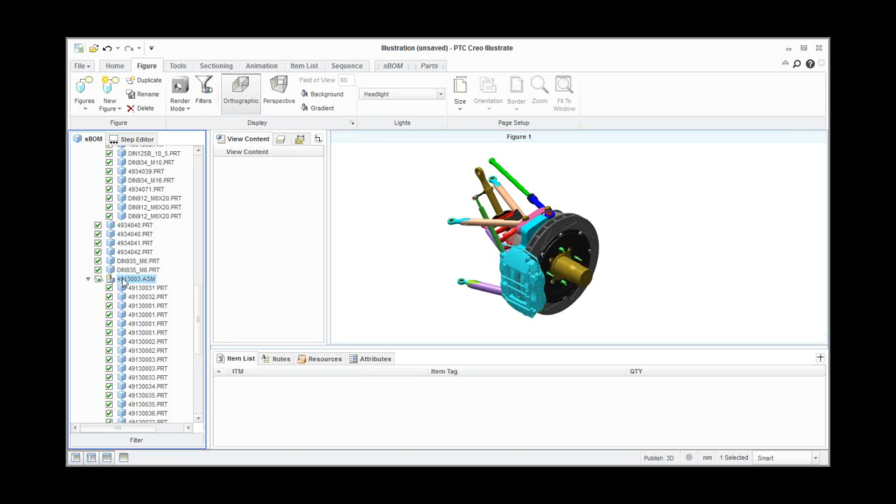So I want to get the whole of this assembly. I'm just going to click this in the tree view, the top level of the assembly, and now I've got just the caliper part. If I right click, I can then say open this as a new figure, and it's just going to bring this particular part in as its own figure.

So I've quickly disseminated that part away from the main assembly, and again I can use this as a new figure. Select that current view, and that will be my view. So again, I go to figures, and now we've got the two, so I can quickly move between them.

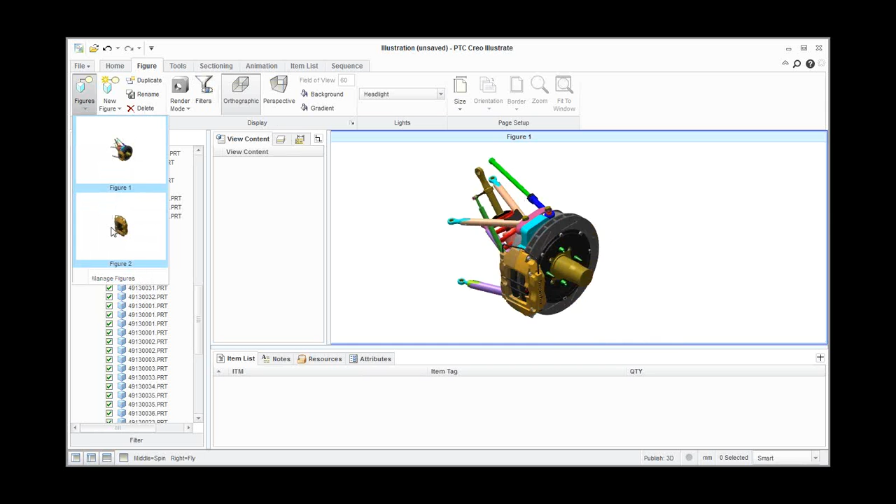The other thing I can do here is right click and rename this. So rather than just keep calling them figure 1, which would go on forever, I can say I want to give this the name exploded view. So I'm just renaming it.

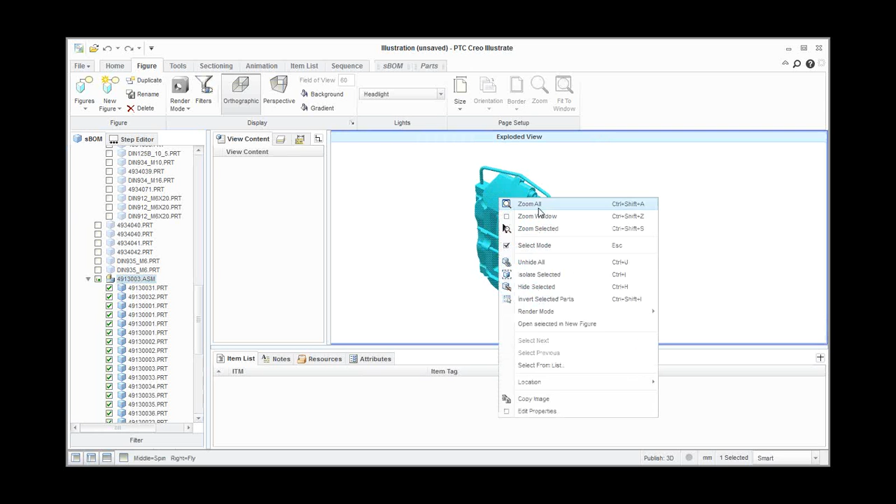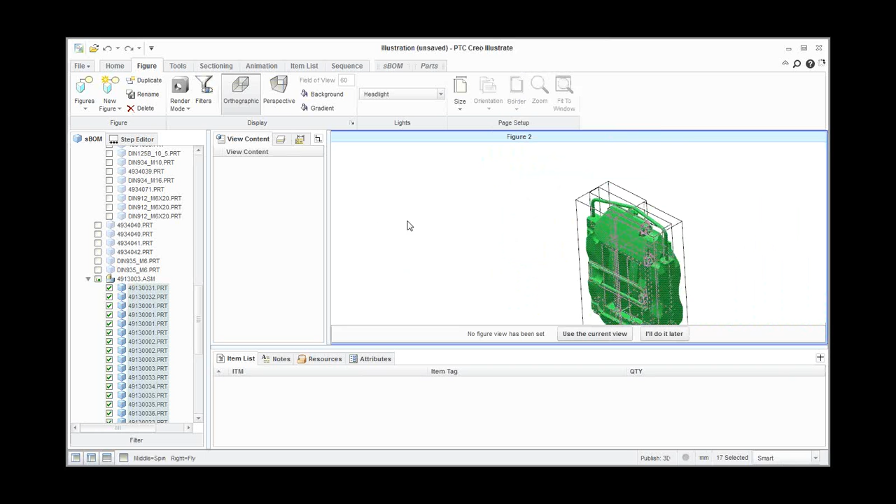I can do the same again. I'm going to take a few views of this and use this as a current view, and rename it as animation, so we'll do some animation. And I'm going to do the final one, which we'll call a sequence. As you can see, it's easy to just right click and rename, and then I've got those views that I want.

So I'm going back to the original figure, the exploded view. If I want to create a technical illustration of this to go into that XML publication, there are a couple of things I need to do. I could just use it as it is, but for this example I want to use it as an exploded view. So what I can do is transform this.

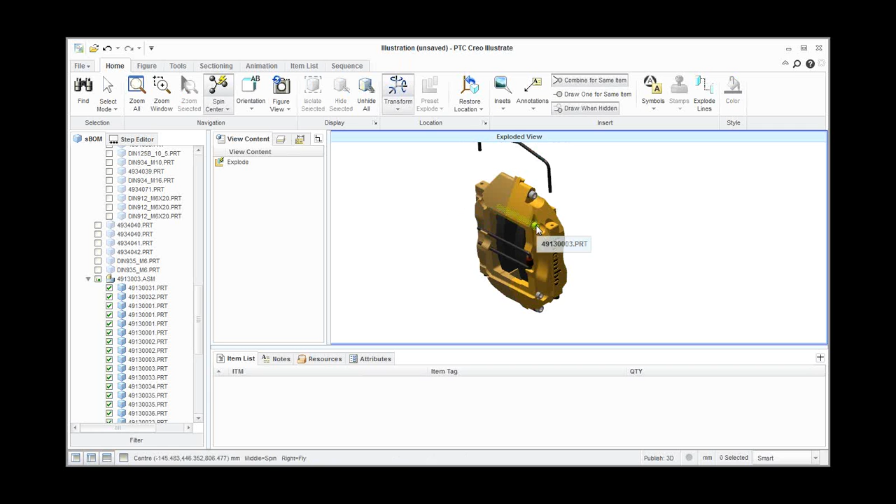I can pick up these individual parts and move them away, and you can see it gives you a measurement as you move them. I can pick up these screws, and hopefully pick up more than one at a time, so I could just bring these out. I can zoom in and out if I need to as well.

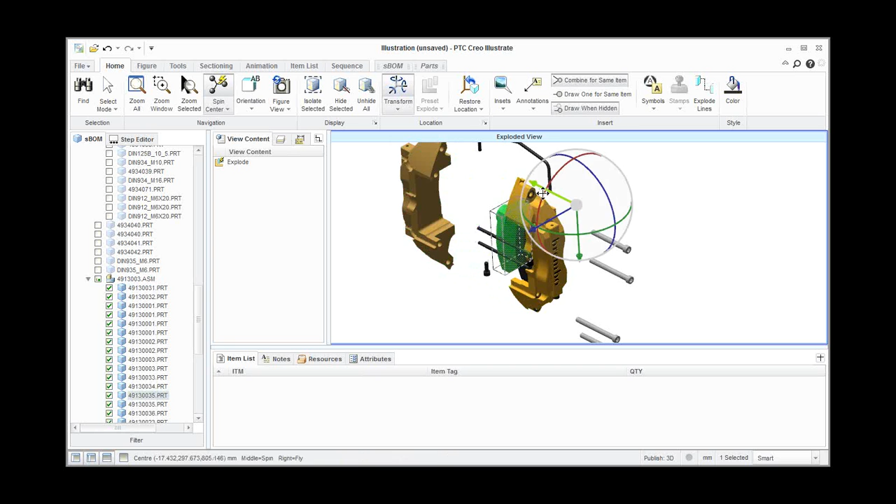And then let's move these away. I can move the casing away, the calipers as well. Let's just move this part a bit further this way. So you can see I begin to work with the model. So I'll just move that out.

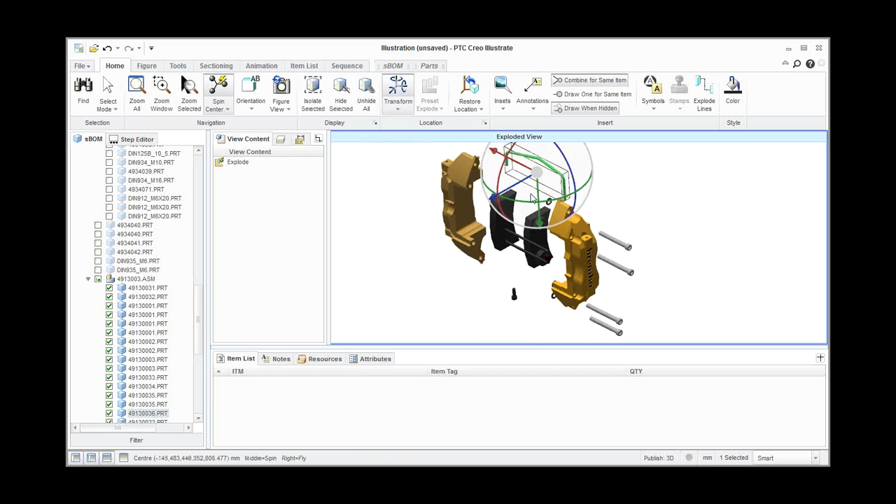So what I want is to get into a position where I can create an exploded view with actual annotations, so I can annotate each part. I just need to separate them a bit more. I could do a lot more work on this, but for this purpose, you'll see that we're going to create quite a lot in the time we've got today.

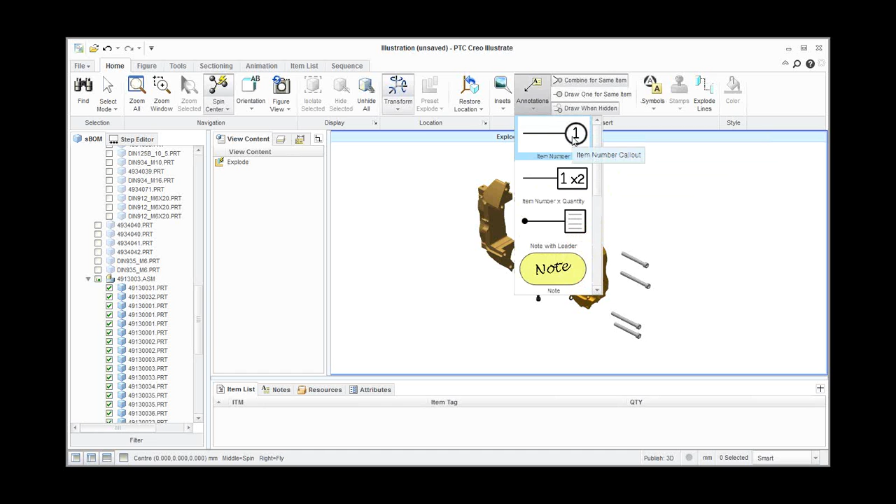Okay, so now I want to annotate this. What I do is I've got a particular annotation tool, which is up here. This is kind of a standard thing with illustration, that we have a leader line and then a number within it. It's also in CAD as well. So I then choose the part and then I drag out.

So I'm just dragging around. You'll notice on here that when I get to these items, we have two number 6s because there's actually 2 off of that particular screw. So the software is intelligent enough to know that, and the same will apply elsewhere.

In fact, we could actually change the callout. We have another option here to do it by quantity, which doesn't seem to want to work. Let's just go back. There we go, so there's 2 of those. So that's number 2 times 2.

So we've created the annotation. Obviously, this is rendered in a particular way, which is shaded a bit more like the CAD model, but we can actually render in different ways as well.

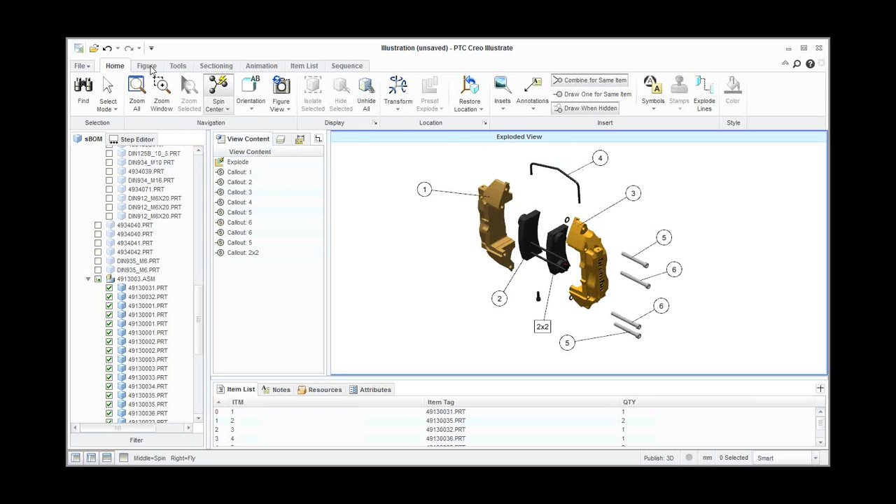So if I just go to figure here, we have different ways of rendering this. If you want more of an artistic kind of view, you can do that kind of on the fly.

Some of them are quite nice, others not so good. One with just coloured lines as an outline. And we can save all these again in different figures if we want to and replay them back.

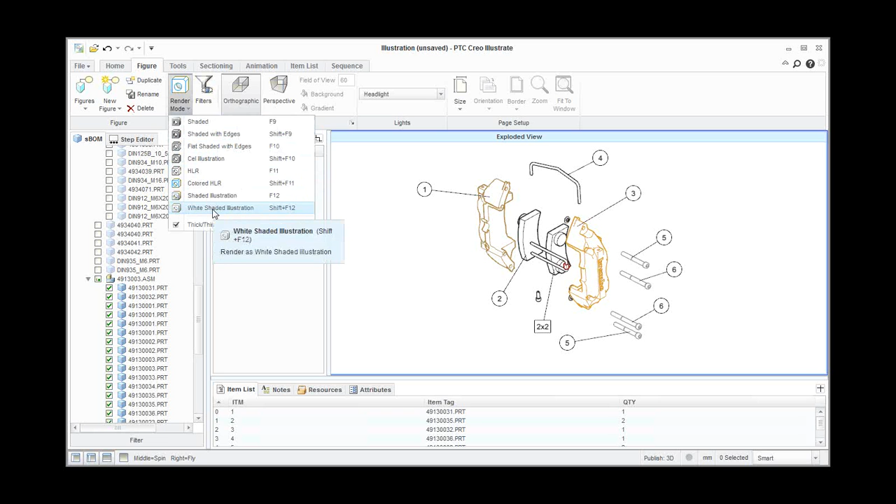Okay, what I'm going to do is a hidden line removal. So it's going to look a bit like this, so a bit more like a technical illustration.

And how I do that is I go to my file menu and save the figure as an illustration file.

And here I've got 2D formats. What I'm going to do is use the CGM format, because I know that format works well with Arbortext Editor. These other formats you can see are IsoDraw, which we'll look at briefly in a few minutes, but I'm going to use CGM.

And I'm going to put it in a particular directory so I can find it. So I'm going to call this Exploded View Creo, and then we'll save that.

So at this point now it gives me some options. It's going to do a hidden line removal. It's going to create this technique, which is an illustration technique called thick and thin. I can optimize this so it's got Bezier curves.

So this would be more if I was going to then take it somewhere else and use it in another piece of software, such as IsoDraw. I'll use these anyway, and then we can use different profiles on here.

So I'm going to choose WebCGM. I might have time to explain a bit about profiles in a bit, but basically CGM is an open format. It's not proprietary, so it gives us a good way of actually moving the files around and being interoperable.

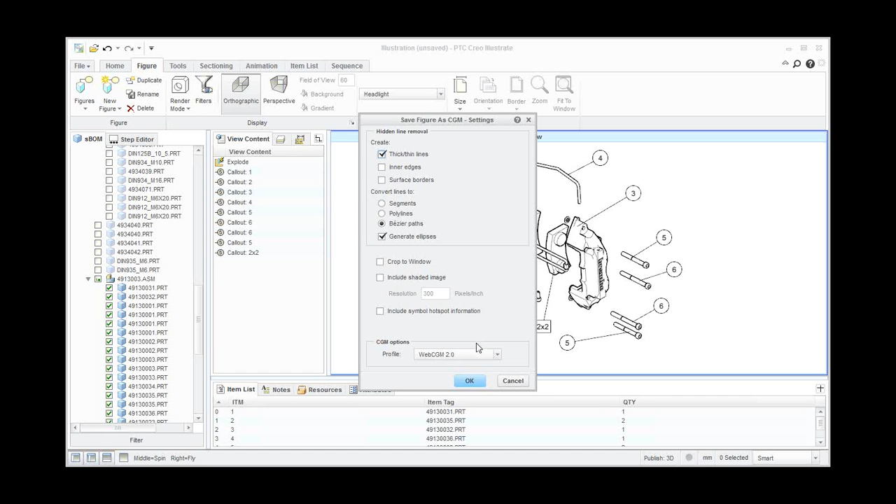So I'm going to say OK. And it's actually created that in that directory. I'm not going to go to it now.

But this is the first part of the demonstration, that now I've created that illustration from the CAD model, which is then going to go later on in the presentation into the XML editor, for further publication of the technical manual.

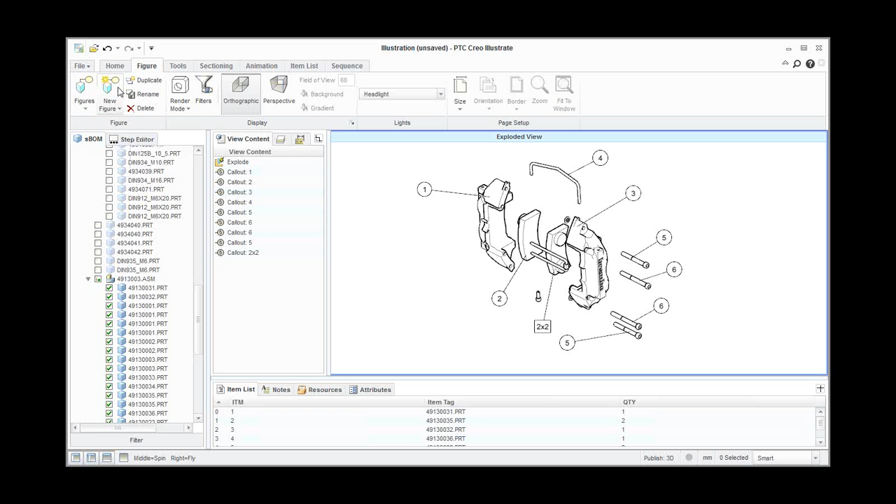Okay, so I'm going to move on from there, just to show the repurpose of the data could also be done for a 3D deliverable as well. So to do that, I'm going to go to the next one, which is animation.

You can see now how useful the figures are, because I've now got the exploded view in that particular state, and these at the moment have been untouched.

So the animation, we've got the animation tab up here. I'm going to click Advanced, and I know you see there's a red dot at the top here. That means we're recording, so actually whatever we do now in this session is going to be recorded.

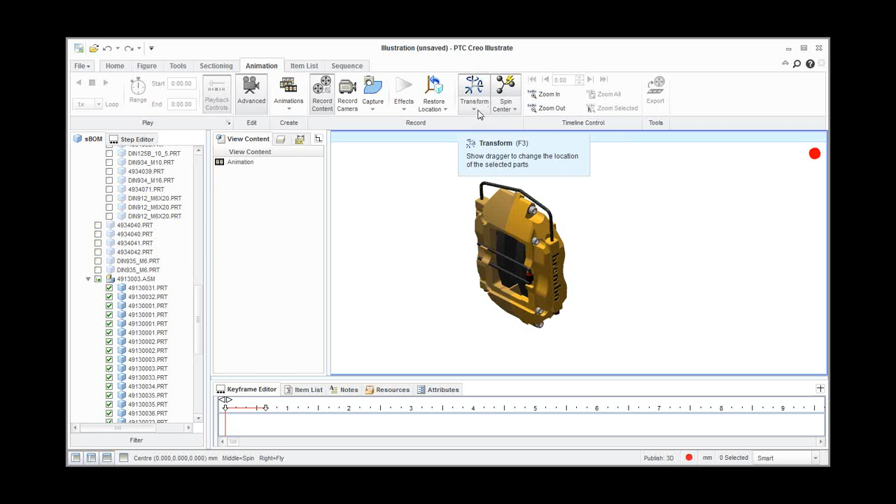So the first thing I'm going to do, similar to before, I'm going to transform this. So I'm going to take this top clip away from here.

Hopefully, there we go. So I don't know if you can see down the bottom - this is why I need this other window up - we're beginning to create a timeline.

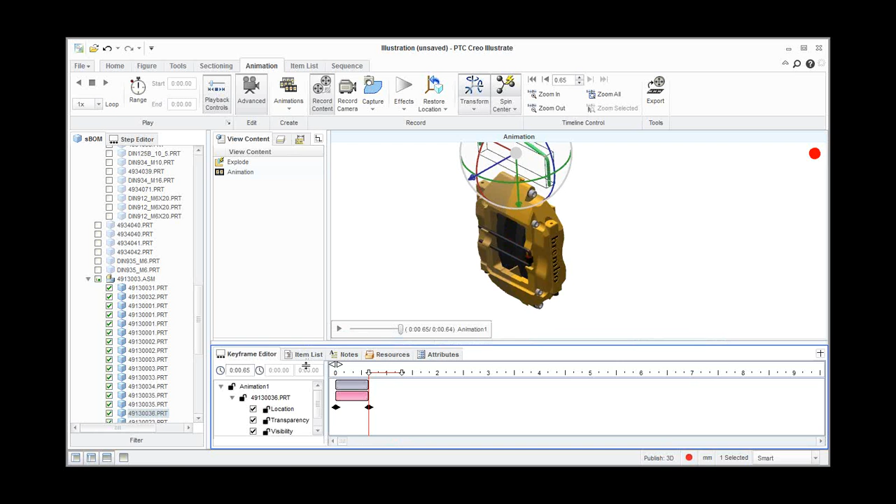So you can see the animation. It even gives us the part number of which we've just exploded there as well. So let's just move this down again. So what I'm beginning to do now is beginning to explode this.

So say this particular screw, I've got an effect that I can apply where I can unscrew it. Now don't worry, it's going to go the wrong direction to begin with, and I'll explain why. Because it's automatically done it, and unfortunately it's done it in the wrong direction. So what I need to do now is just say it's the wrong way - it's gone down plus instead of minus.

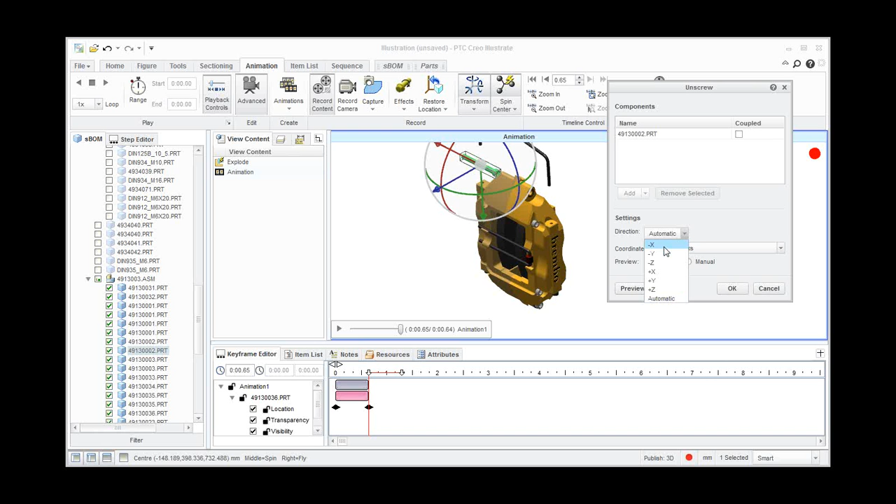So I don't know if you could see that was actually turning - might be difficult to see within the webinar, but that part actually turned. I'm going to click OK to that. So you can see there's another added to the timeline down the bottom here with that actual effect taking place.

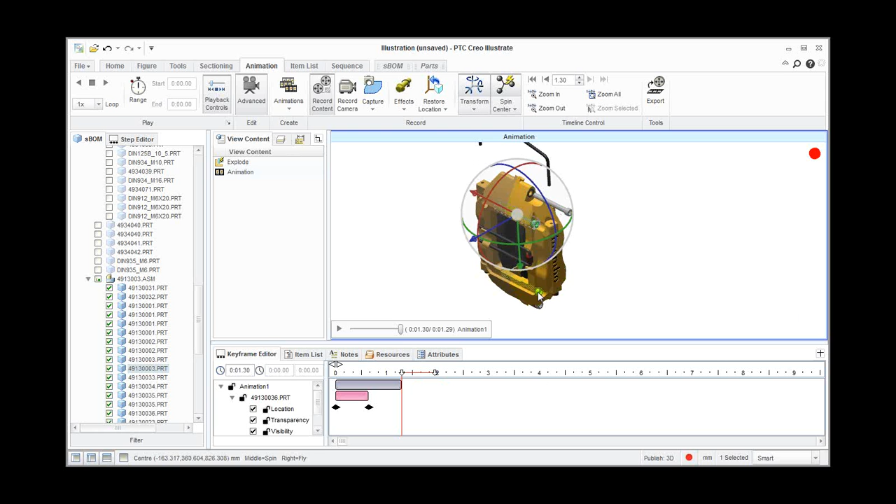And what I can do now is actually, hopefully, pick up the others. It's not always easy just to get these particular parts. And I think I can apply these effects to all of them, but obviously in the other direction.

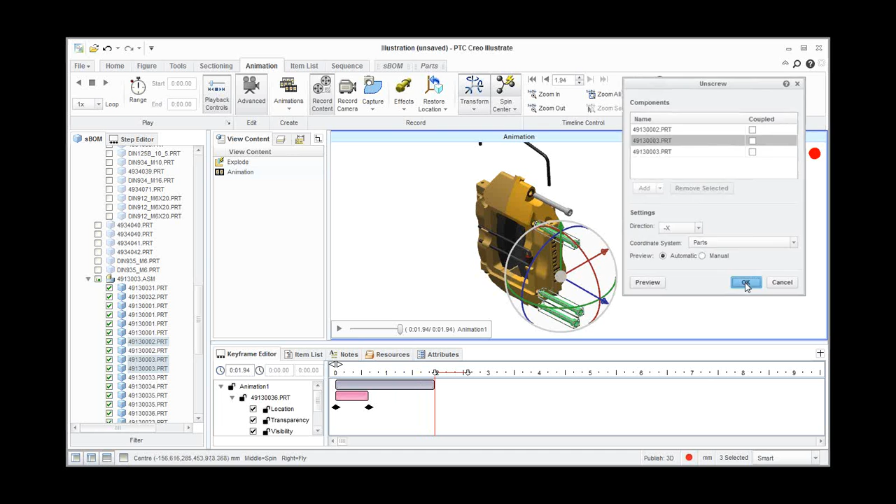So now I've taken all of these and unscrewed all these screws. I'm going to click OK, happy with that. And now I'm going to move them all away from the casing.

So everything I'm doing is recording. It's just going out of range down the bottom here, but you'll begin to see the timeline build up. So at any time now, if I just zoom back out again, I can play this animation back.

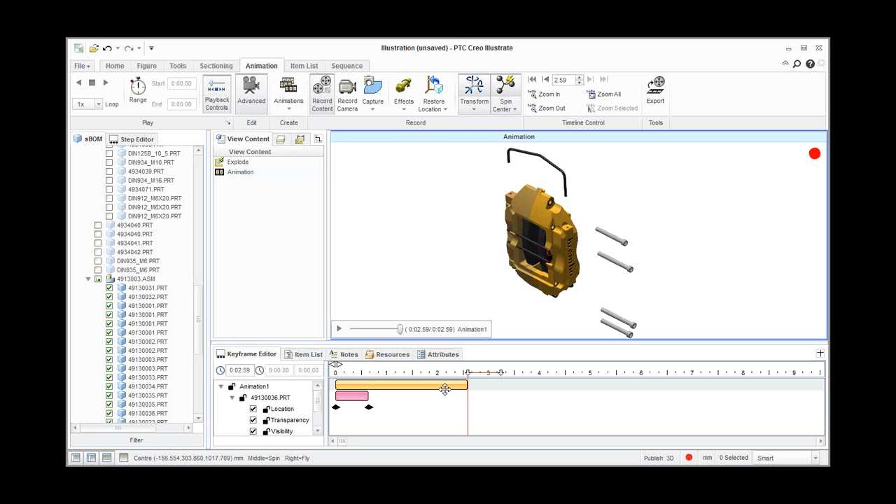So that was happening quite quickly. So you can extend these timelines out, slowing them down so that we're going to extend the time out that it takes to do certain functions. So once you've done it, you're not actually limited in what you do - you can still edit it after you've done the animation.

Okay, so the next thing I want to do is these particular parts, now that I've exploded them - oops, I just need to select that one - I want to actually fade them away. So these are all effects they can do, so I can fade those out.

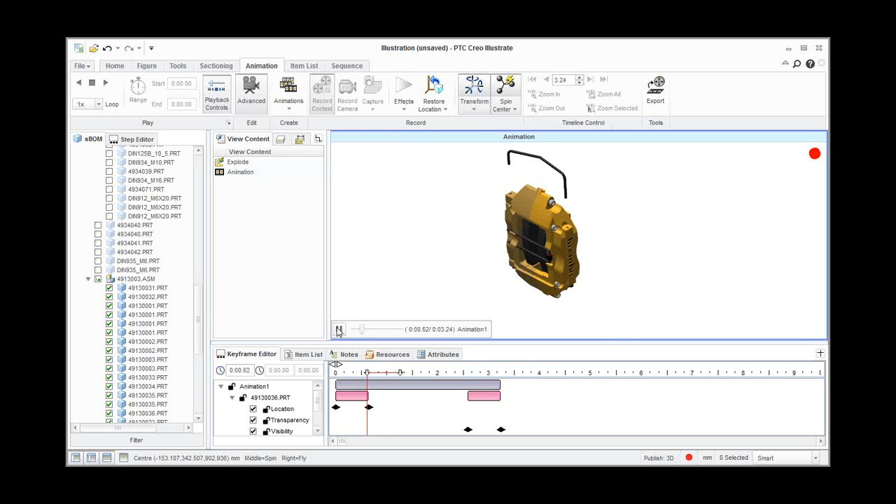So if I play that back again now, each part will explode, and then it will fade out, and then it gives me the opportunity to actually explode these other parts. So I've got those out of the way.

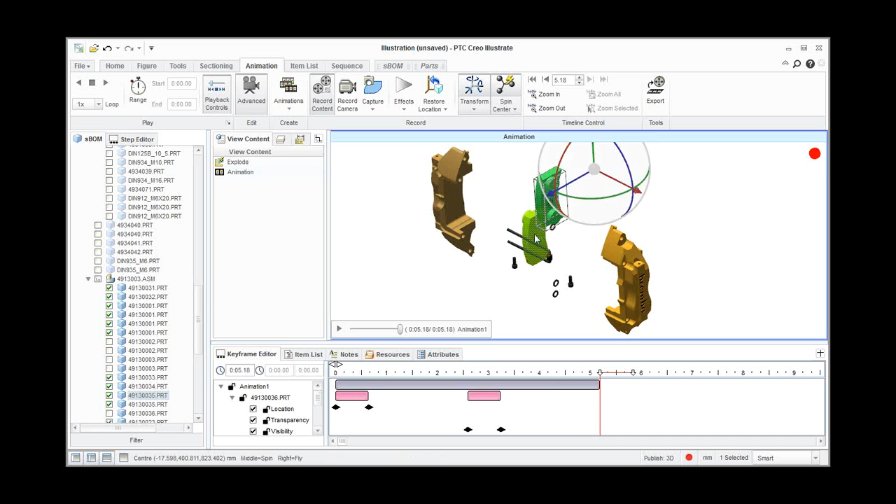So I'm going to move this part away, and this one. And then I'm down to the calipers, and I'm going to take that away in that direction. Okay, I think you're beginning to get the idea.

And I think the key thing is the speed that I'm doing this as well. So this could be then repurposed. I can export this as a movie, like a WMV file or MPEG file. I could put it into a PDF file. I could use it in Creo View.

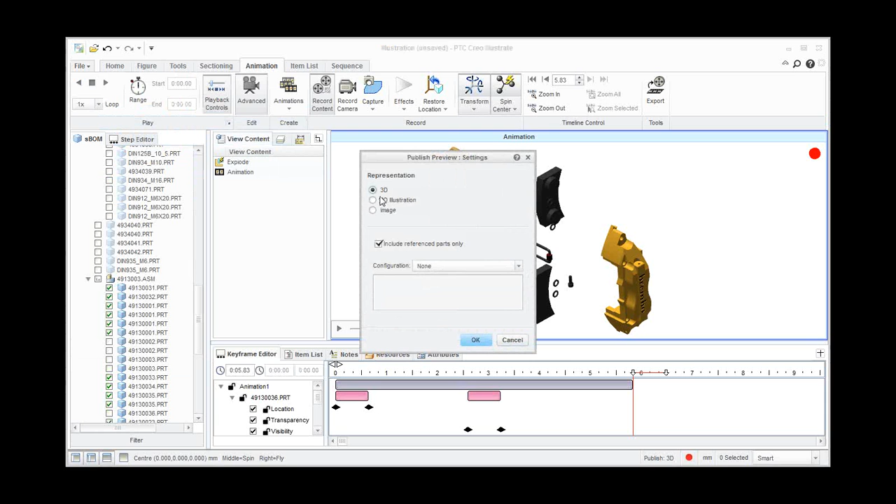So let me just go to - here we have this ability to publish a preview. And I'm going to say 3D. And then I see all my figures, and then I can play that back. So it's pretty much what I've just done, but it's going to look more like it would do in, say, Creo View.

Okay, again, powerful in PDF as well, because I could get that out to obviously a lot more people using the Adobe Reader.

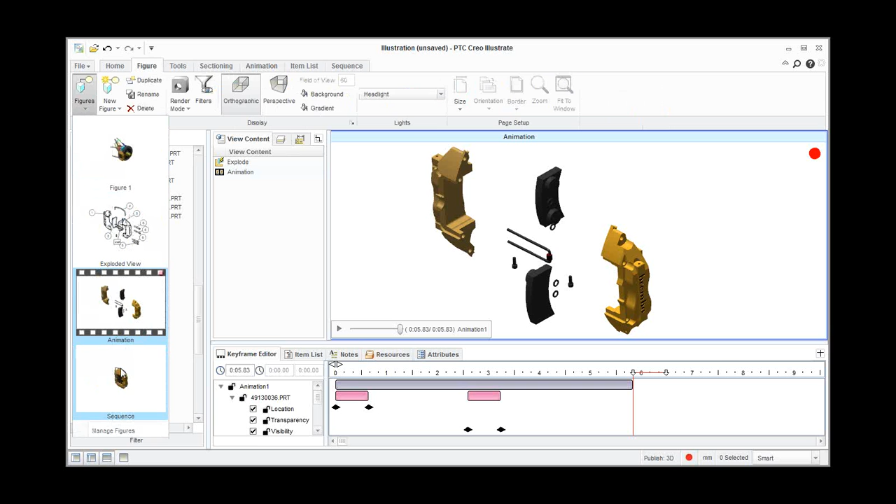So the final part I want to do is go into the figure again. I want to go to my sequence, and with this particular one, this is very similar to before, so I won't labor on this too long.

But this is more if you were doing like a procedure, so you wanted to actually give some notes to remove certain things, but they have to be wary of something else, like a warning. So a procedure that you might have written down in a technical publication, but this time a 3D procedure, but still with the text.

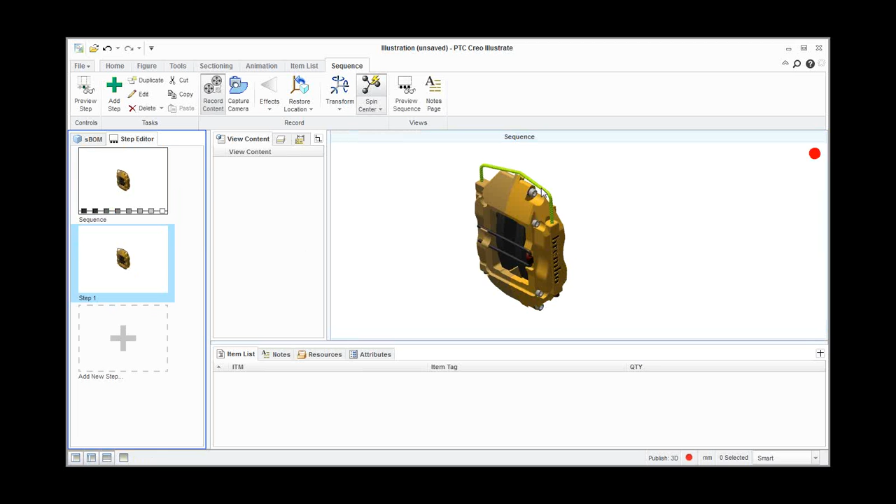So I'm going to add a new step, and what I'm going to do is very similar to before - I'm going to transform this. So I'm just going to pull this part away. Okay, so that's step one. And what I can do now is create some text.

So I'm actually writing this down, and we'll see this appear when we play this back. You then get the ability to go through this in sequence as the procedure, which is really useful if you're assembling or disassembling something.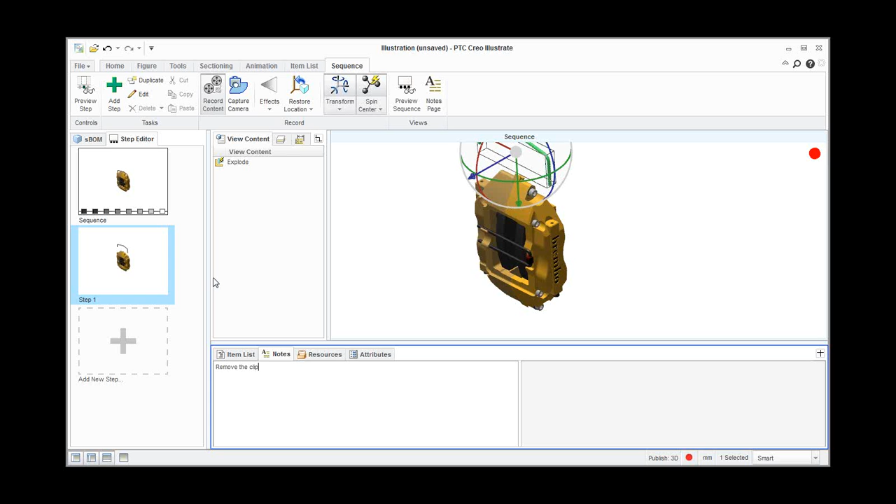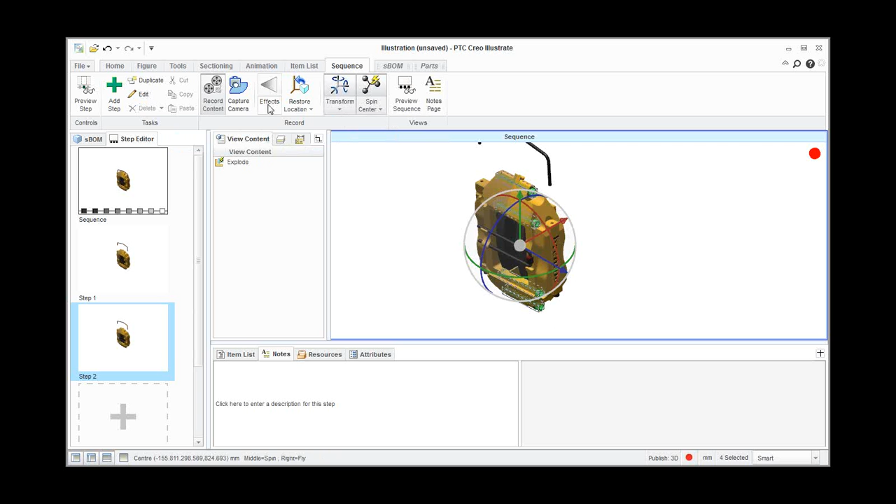Now I'm going to add another step. This time I'll take those screws out again. Sorry if it's a bit repetitive, but it's good to see that I can work with this particular part of the assembly in different ways. So I'm going to create that effect again where I unscrew it, and then just move that away.

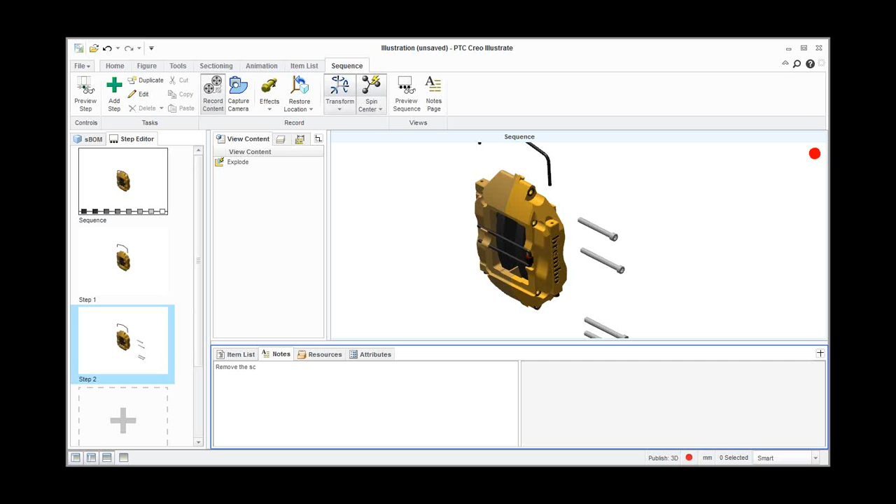If I add notes into this step, I'm going to remove the screws. So I can preview the sequence in here.

I could publish again to see what it would look like in, say, Creo View. Obviously it doesn't play back automatically, so I have to click on here. There's the text, 'remove clip, remove the screws,' and I could use the same effects as before.

We could also put warnings and cautions on this as well, if certain things are hot, or for maintenance you could put notes saying you need to oil this area. So it's a really useful tool if you want to deliver either to your customer or internally if you're assembling or disassembling equipment.

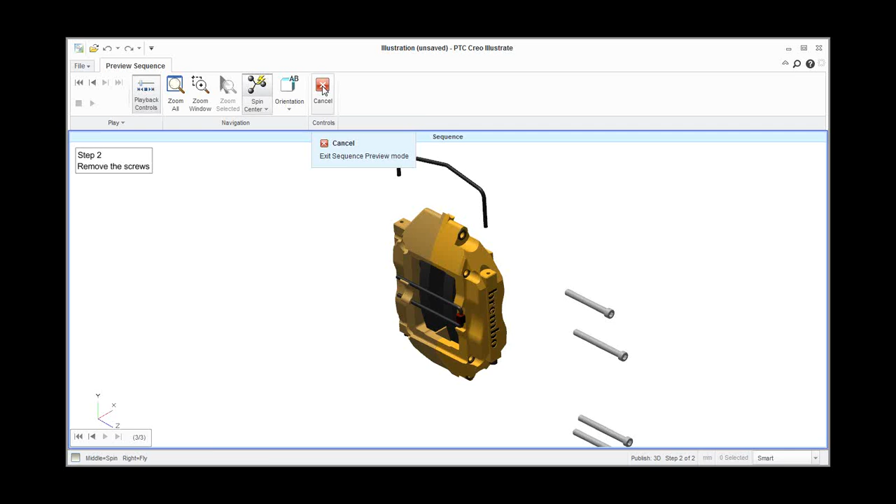Okay, so I'd like to end it there on Creo Illustrate. I think hopefully that gives you a good flavour of the software, and we'll move on.

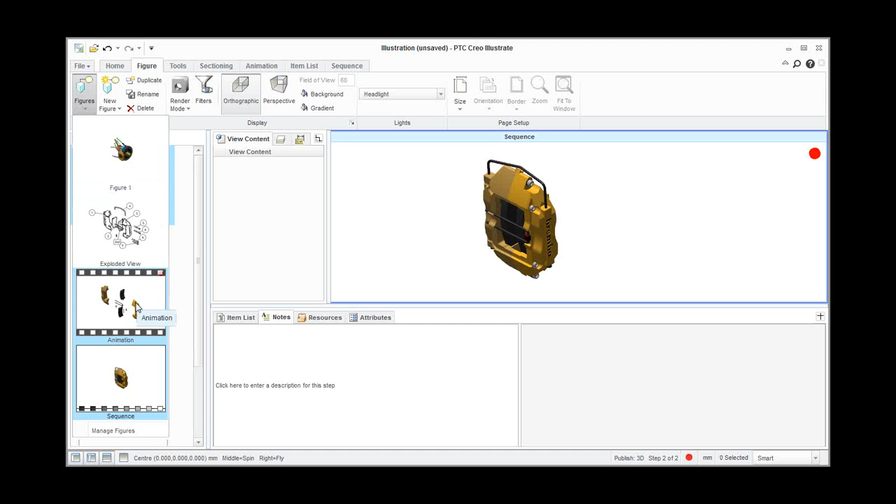So just going back to the figures before, you'll remember right at the beginning we created this CGM file, which we're going to look at in a few minutes in the XML publisher. We've got the animation and the sequence all from that file, and this is where we started with that original model.

Okay, I'm going to move on to IsoDraw, so just quickly go back to the slides. IsoDraw has been around for many years as a 2D technical illustration program, kind of the professional tool that's been used by many different types of companies, from commercial companies, machinery, manufacturing, mining, through to defense companies such as Boeing and so forth.

So it's got a really wide range of users and is still widely used today. As I said, it's a 2D drawing program. It can import 3D, but now that Creo Illustrate's around, I think the combination of the two is much more powerful than IsoDraw's 3D import capabilities. It's great for maintaining legacy illustrations in vector or raster format. It's got a macro facility where you can automate tasks, and you can import — as you could see from Creo Illustrate — it supports the IsoDraw format, so I could bring in illustrations from Creo Illustrate as well.

As Creo Illustrate does, IsoDraw supports the CGM format, which is an open format. If you're in the defense or airline industry, that's really important to support, because both those specifications require CGM as their deliverable for technical illustrations. So even if you've got 3D, at the moment there's no 3D format for those specs, but there is a 2D one, so you can easily deliver and be compliant.

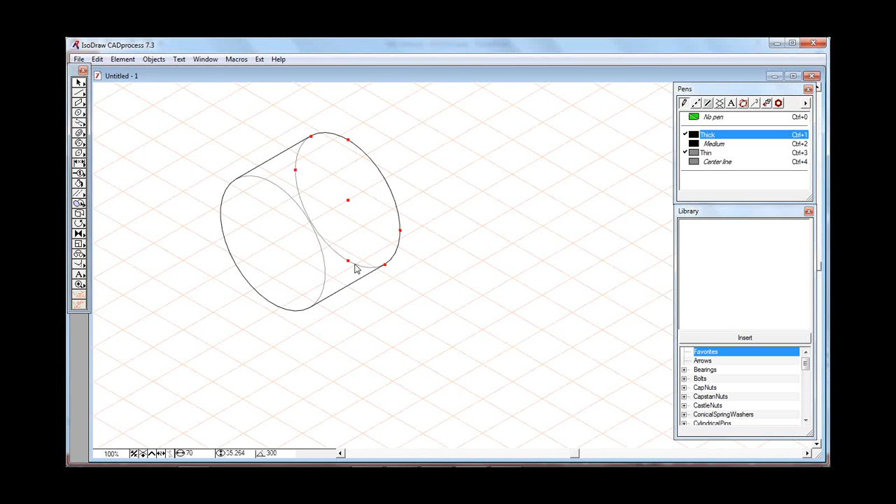Okay, IsoDraw — I'm not going to go too long on this. Just to do a few things so we can draw very easily. I think with the program, if there's something photographic that you want to trace over, it can be very easy to do that. If something hasn't even been modeled yet, you can begin to create illustrations very quickly. We can create things like threads and so forth — things that could be missing off the CAD model — and apply them very easily and quickly, like external threads.

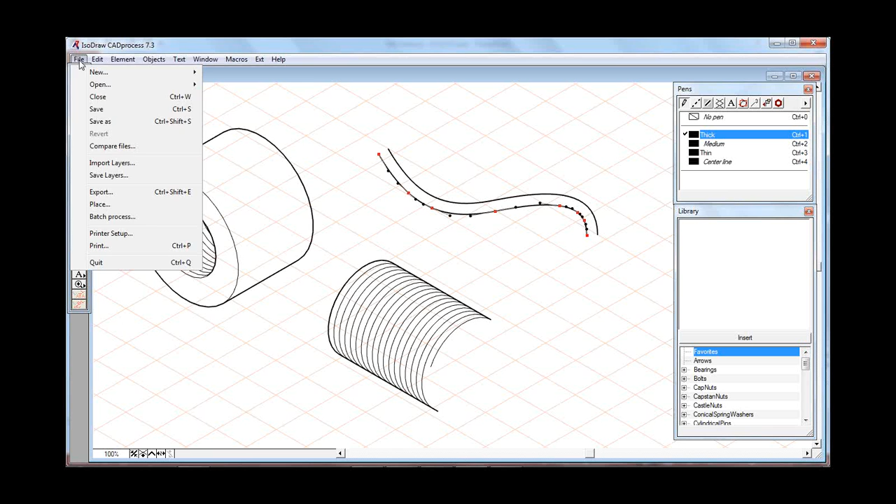Bezier curves — so it's more of a graphics program, very good if you need to do complex curves. If there's hoses, we can create those very quickly. And it supports all those formats we spoke about before, like CGM, or it can support EPS and things like that, so it could go into Word or other graphics and technical desktop publishing programs.

So I think there's still a place for IsoDraw, and still a lot of users out there. But obviously nowadays, a lot of information is coming from the CAD models, and that's what we're really showing today.

Now talking about XML, because that's one of the topics for today.

It can create reusable components. It can work with different specifications, and it's really for publishing those technical manuals, suites of technical manuals, to your customers.

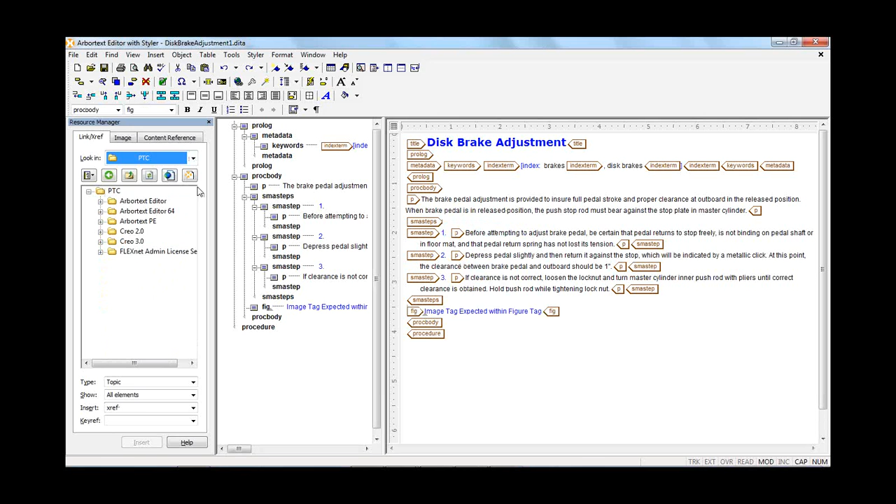Now I want to bring in that illustration that we did. I'll put it on the desktop, and I think I would put it in here. Let me just see if you can see it. Yep, it's there, so I'm going to insert that - and there's that illustration. So that's now part of my publication.

So we've gone from the 3D CAD, we've created the 2D illustration, we've put on the annotations, we've created that thick and thin technique, and now it's part of that XML publication. We've taken it right through from the original data into something we're going to deliver to the customer.

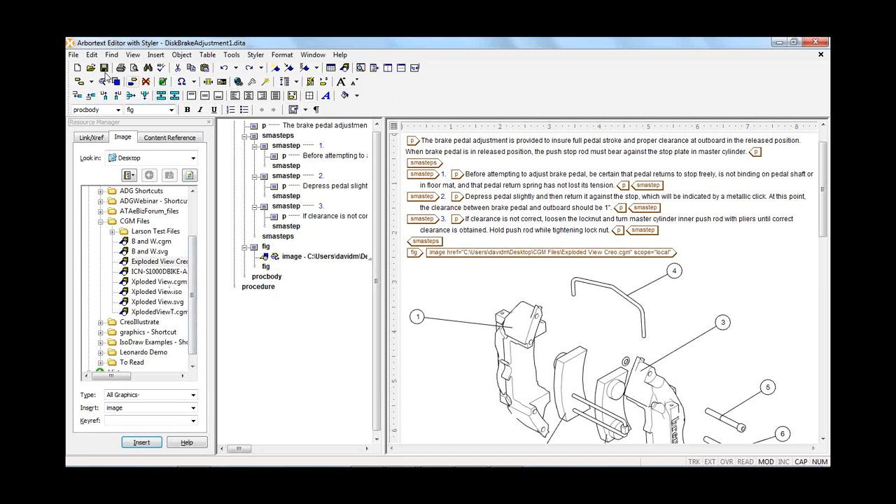Okay, so what I'm going to do is save that and close that down. So what if we need a new topic in here? Perhaps we want to add something to the brake system. I just need to indicate where I want it to be, and say we want a new procedure.

This time, rather than sample data, this is a brand new topic. I'm going to put in something quite obvious - sorry about my typing - I'm going to say new procedure, and insert it at this point. Okay, so it's added in. I'm now double clicking on this, and you can see it's kind of a blank document.

Because it's a procedure, it has a step associated with it. So if I hit return again, I can add my next step - could be the procedure I've just done before. Obviously, I haven't got time to actually add in all the different steps here.

Be a bit boring as well.

And what I also want to do is add in what we call a reference, an index item. So you can see it's quite quick just to return, and then I'll get to index term. I'm going to put caliper in here. And I might even put that figure in as well.

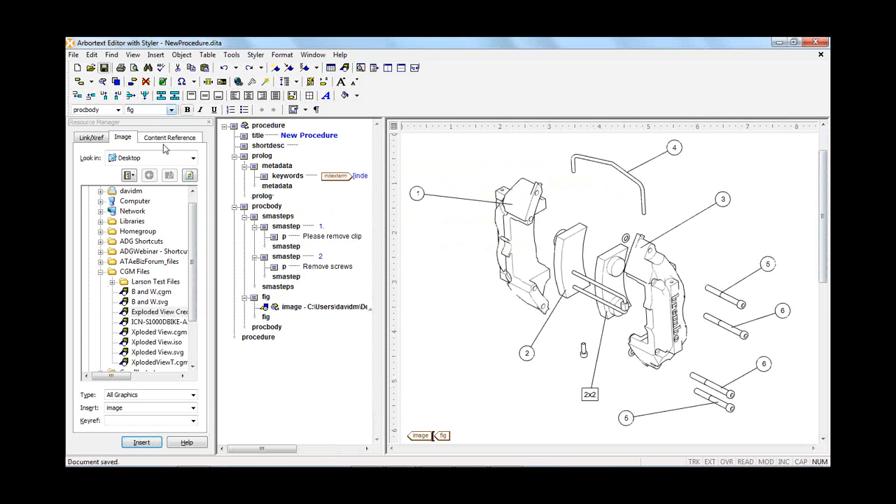Okay, so let's go back to the map. And instead of publishing an individual document, now what I'm going to do is publish the whole manual. So if I go back, I insert my cursor at the top, the top level of the tree. Publish, PDF file. This will take a bit longer.

We should see all the pages going through. It's going to create me a table of contents, an index. It doesn't take too long. And here we have the manual. So here's the table of contents. Trying to see if I can see my new procedure, which is here. Very small, sorry about that.

You can probably see there's the illustrations that are created. And I think we'll get down to the index. And we should see caliper, which is on page 12.

So I've published that, but I've also put something new in and inserted the illustration that I've done as well. And the final part is just to prove this XML is a single source, multiple outputs. I'm also going to create HTML. This just takes slightly longer.

And this isn't the greatest style sheet. Oh, it's very quick this time. Very quick this time, that put me off. And we got caliper, and so this is all interactive. I don't think it's the greatest style sheet I've seen, but it does the job, I think. You can see there we've gone from... so it's single source publishing.